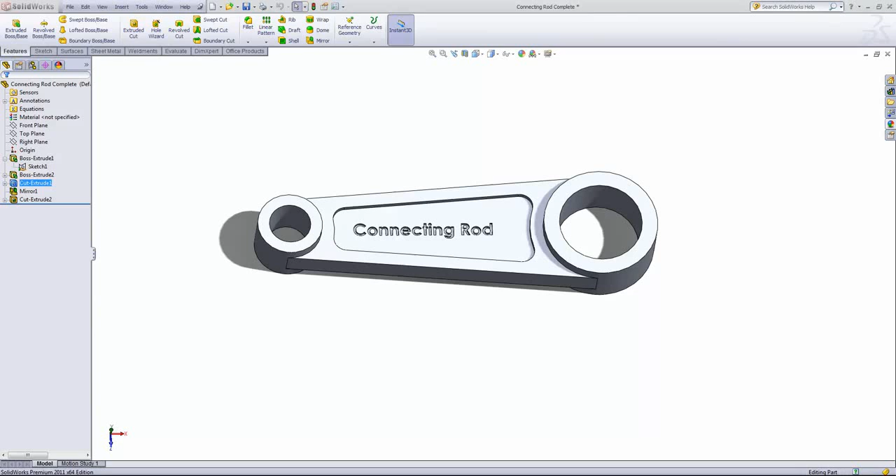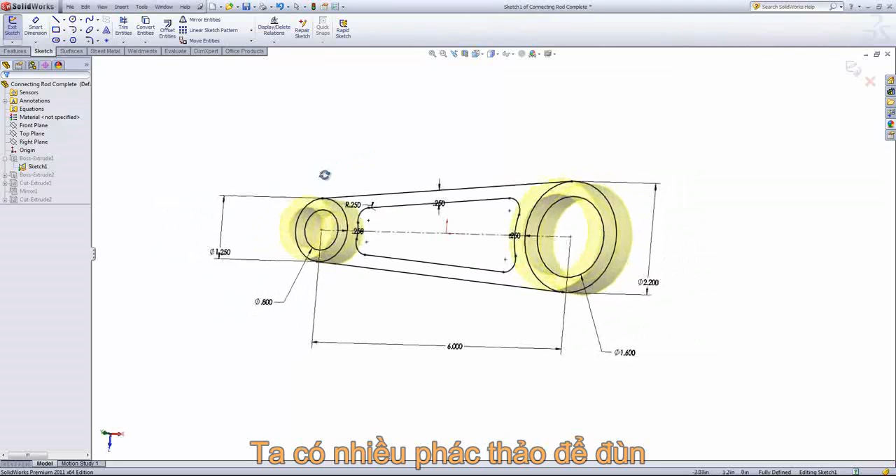In this video, we'll create multiple extrusions from the same sketch, and this allows you to create your entire profile. So the entire profile here that we see, except for the connecting rod sketch, is produced in a single sketch. If we take a look at that sketch, we can see that we have different profiles, and we're going to use them for separate extrusions.

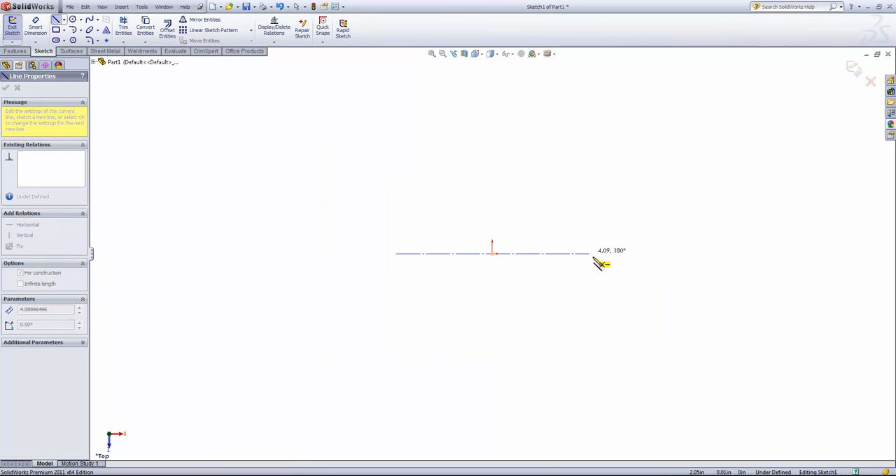So the first thing we'll do is create a new part. Then I'll go ahead and draw up a sketch on the top plane. We'll start by drawing in a center line horizontal to the origin. Then I'm going to make the center line and the origin have a midpoint relation. And then I'm going to place several circles on both sides of the line.

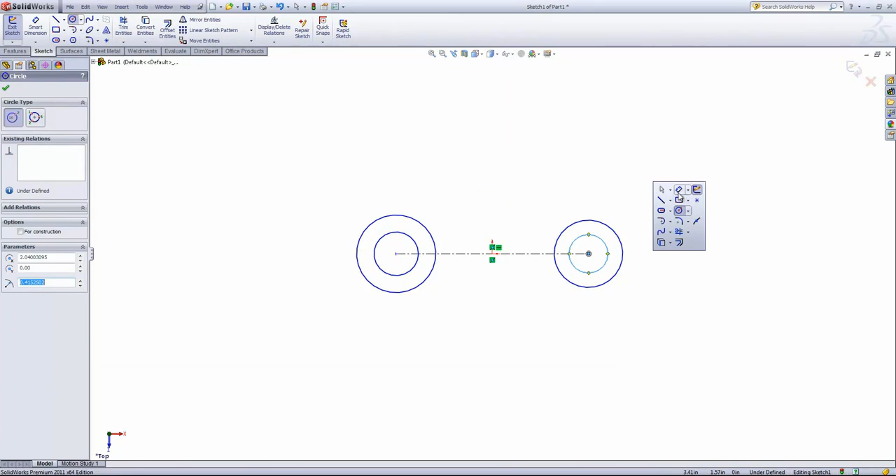And then we'll go ahead and give this dimensions. So the first circle will be 1 and a quarter, and this inside circle will have a diameter of 0.8 inches. On the other side, this will have a diameter of 2.2 inches, and the inside circle will have a diameter of 1.6.

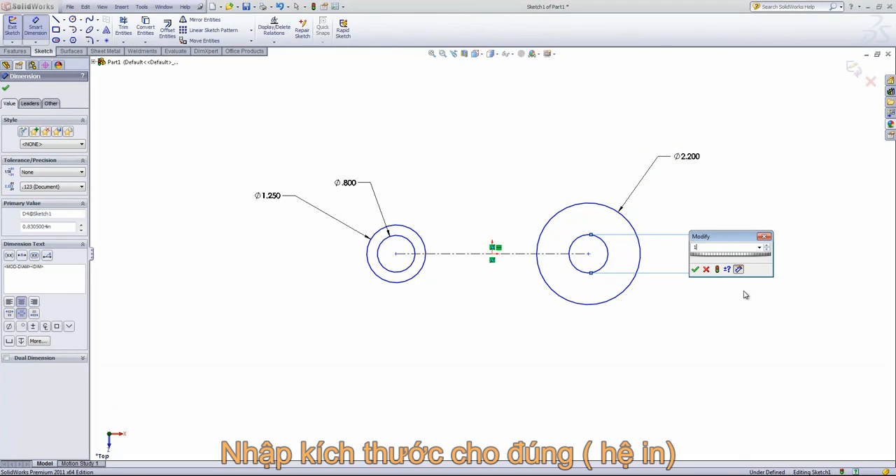From there, I'm going to give this center line a length of 6 inches. Then we're going to draw in a line from one circle to the other, and we want these two to be tangent.

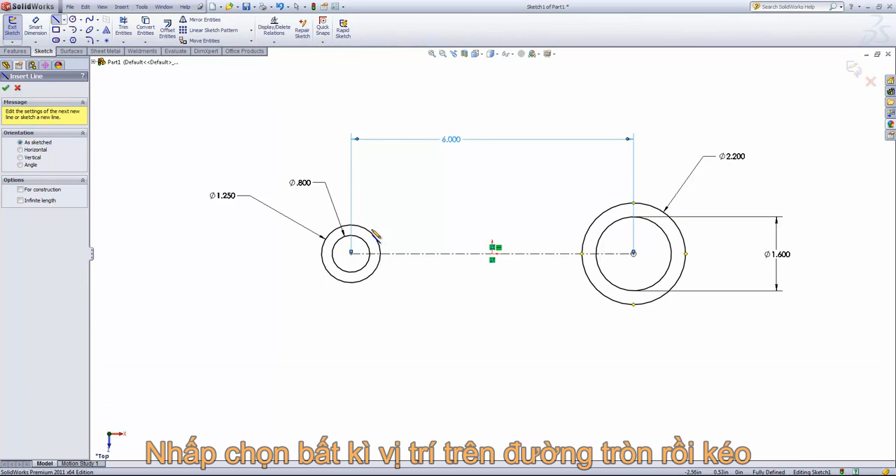And because they're a different size, the only point we don't want to click here is one of these quarter points, because that'll make it coincident to that quarter of the circle. So if I click anywhere else on the circle and draw out a line to the other circle here, I just want to make sure that tangent relation shows up on the right.

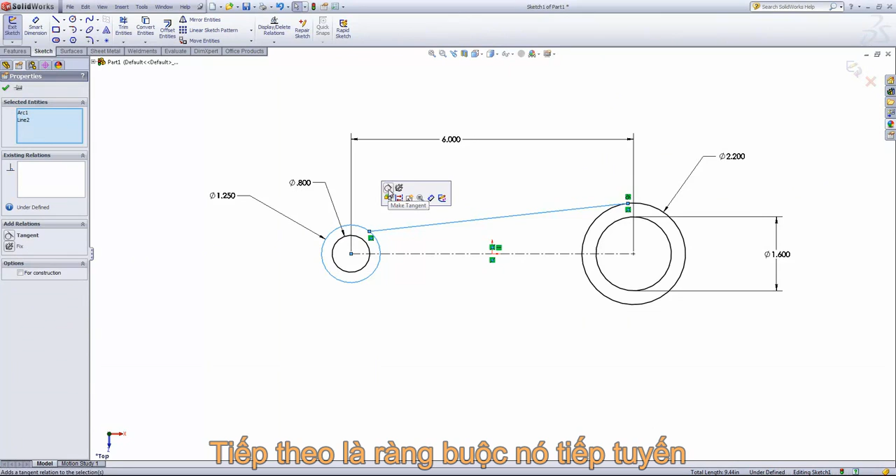I'll go ahead and control select the line and this circle and make these two tangent. And if you didn't have the tangent relation come in on the other side, you can do the same by control selecting the line here and the outside circle as well.

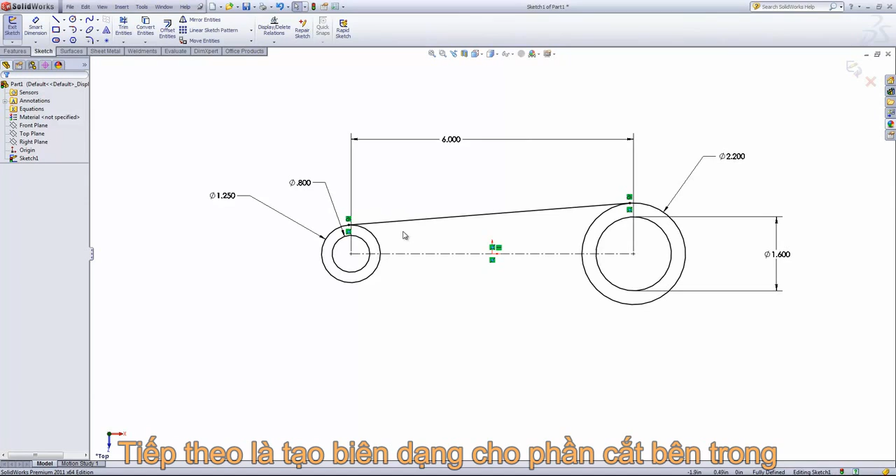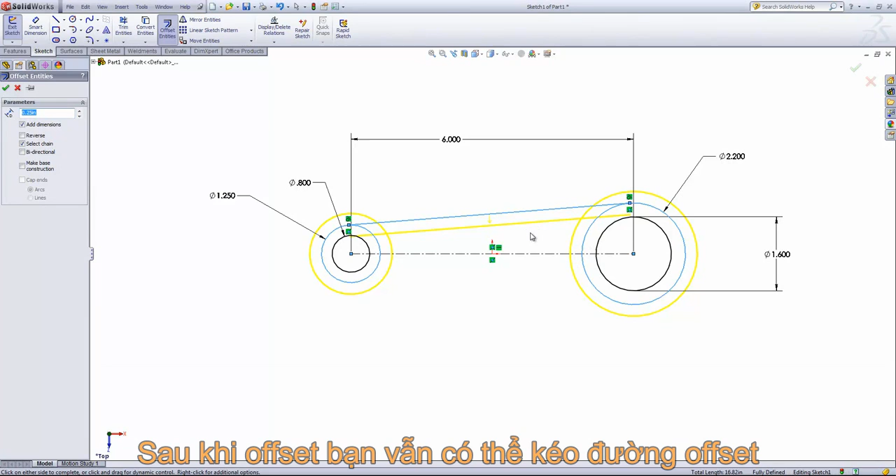From here, we want to create the inside profile for the cutout that we're going to have, and we'll do that using offset entities. I'm going to set the dimension to 1/4 inch, then select out that line, the circle, and this circle here. This is on the correct side, so I'll go ahead and click in the workspace and add that in.

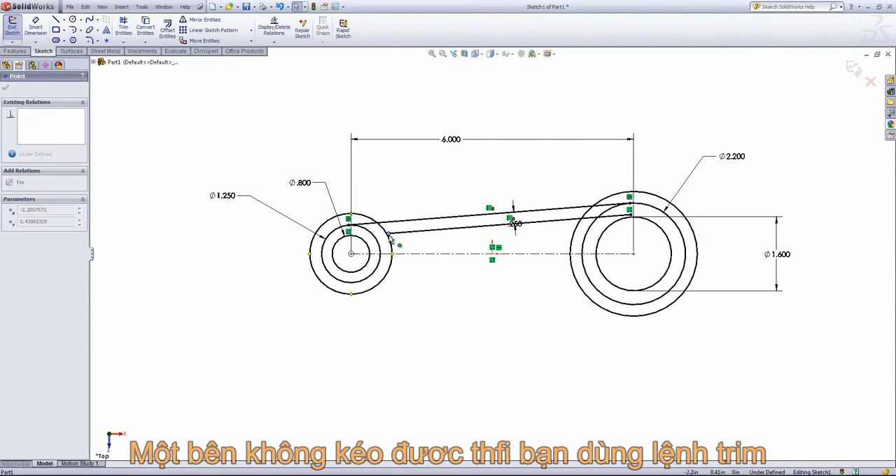Now normally with the offset entities, you can drag out points on a line. So this side we're able to drag out here, and this side we're not able to drag out, so we're just going to use a trim to finish off this profile. I'll drag this point out and control select this circle, and make that coincident. Then we'll come into the trim entities and choose trim to closest.

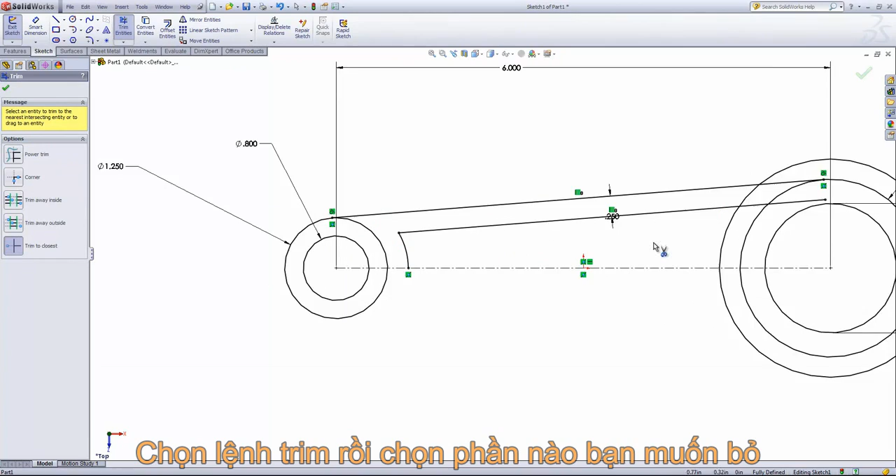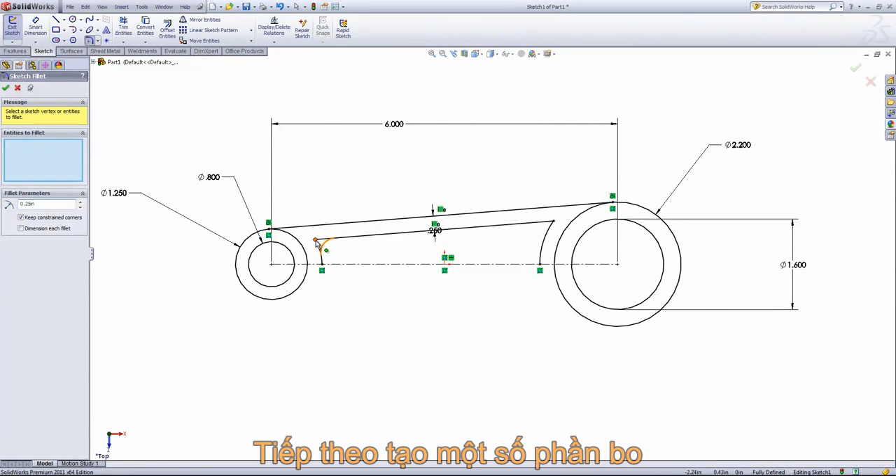I'll go ahead and select out all the entities that we want to remove. Once I have those selected, I'll click OK. And we're going to add in several fillets, so I'll choose the sketch fillet tool, set this to 1/4 inch, and select out these corners.

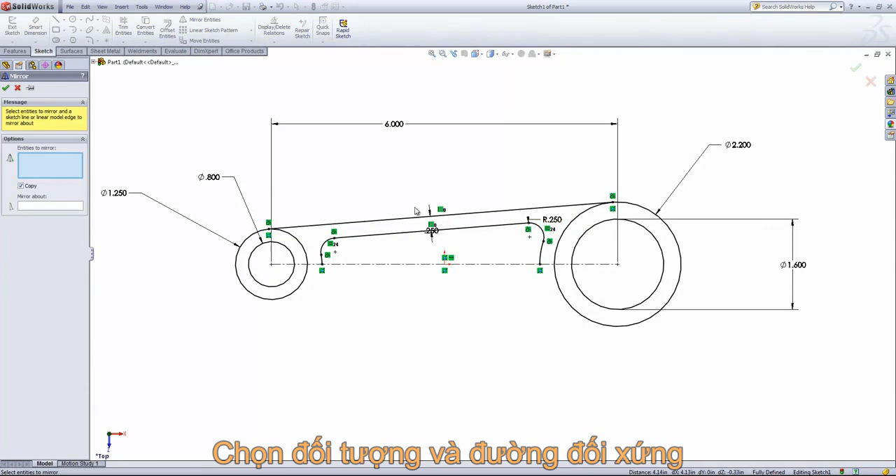Lastly, to finish up our sketch, I'm going to mirror over the inside lines as well as this outside line to the other side. So we'll choose the mirror entities, choose out the top line and each one of these inside lines. Then for the mirror about, we'll choose the center line, and we're just going to leave that copy option checked and click OK.

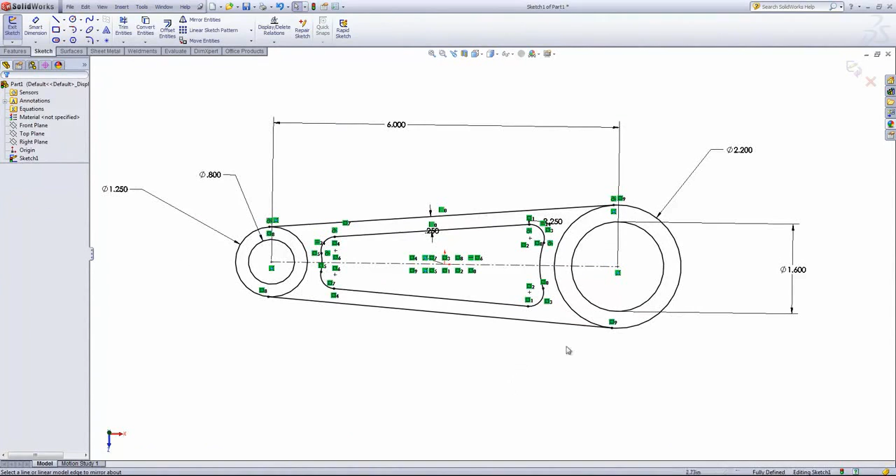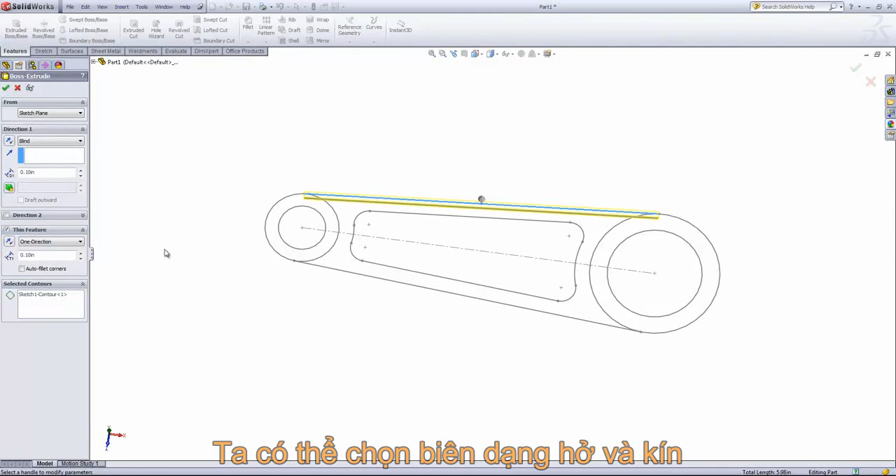From here I can go ahead and exit the sketch, and we can create our extrusion. Now when I choose the extrude tool and then choose the sketch, SOLIDWORKS is automatically going to look for open profiles or closed profiles. In this case it sees multiple profiles to work with, so it automatically brings you into this selected contour box.

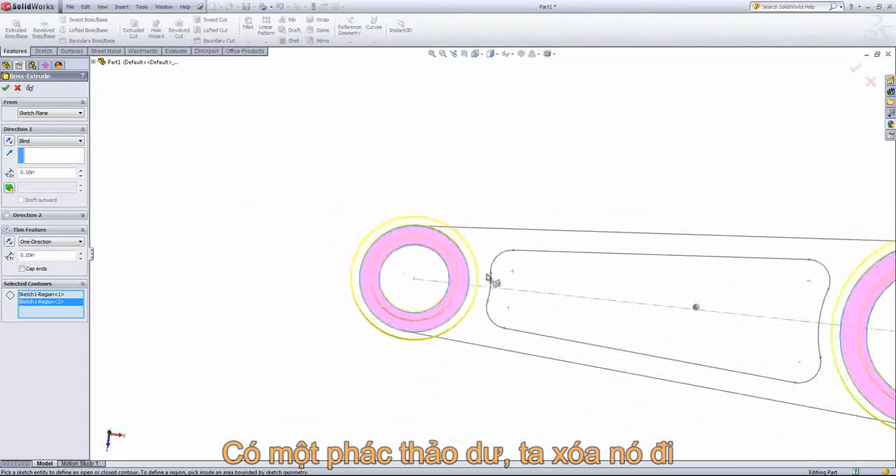If I delete out that line that I first selected, I can go ahead and choose out the two regions of those circles. And I can see it's using a thin feature, which we don't want in this case, so we can go ahead and remove that out.

Lastly, for this extrusion, I'm going to set the end condition to mid-plane, and we're going to set this to a depth of 1 inch. And exit the extrusion.

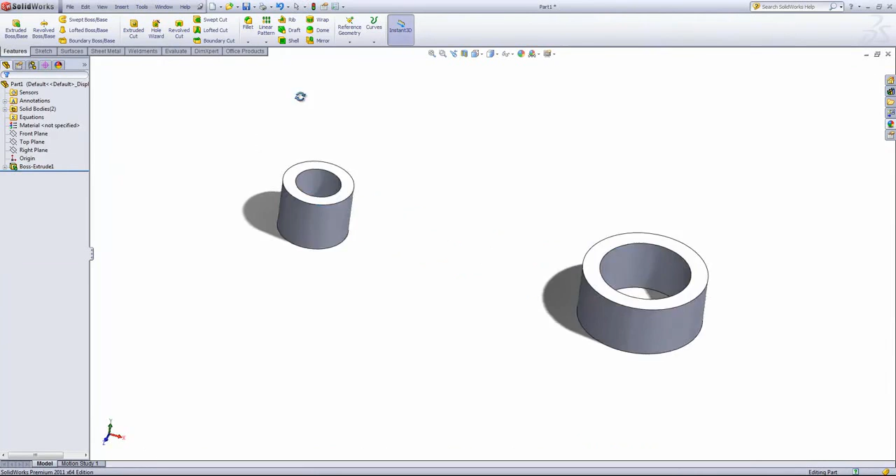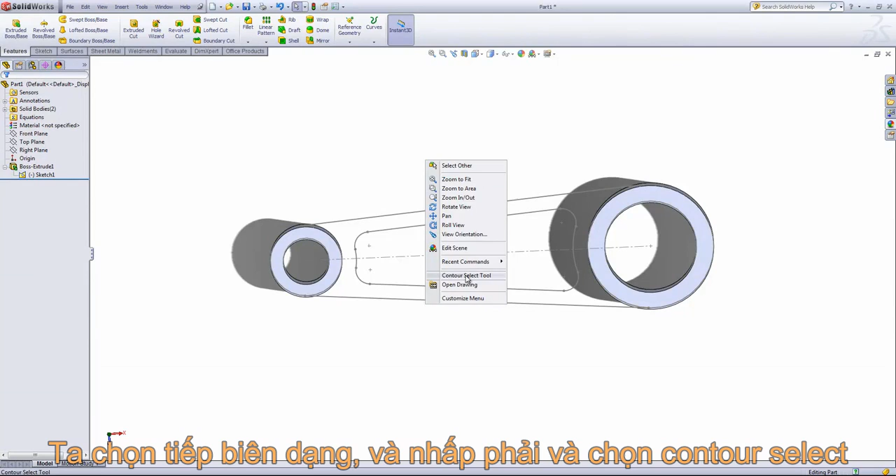Now we want to go ahead and reuse that sketch. We'll click on it and go to Show so we can see it. And that selected contours option can also be accessed before we go into the extruded feature. That can be done by right-clicking, coming down, and choosing the Contour Select tool. So in this case, I'll just choose this outside line, and that'll allow me to select this region. Then we can go into Extruded Boss Base, and it'll automatically populate that region into the selected contours box.

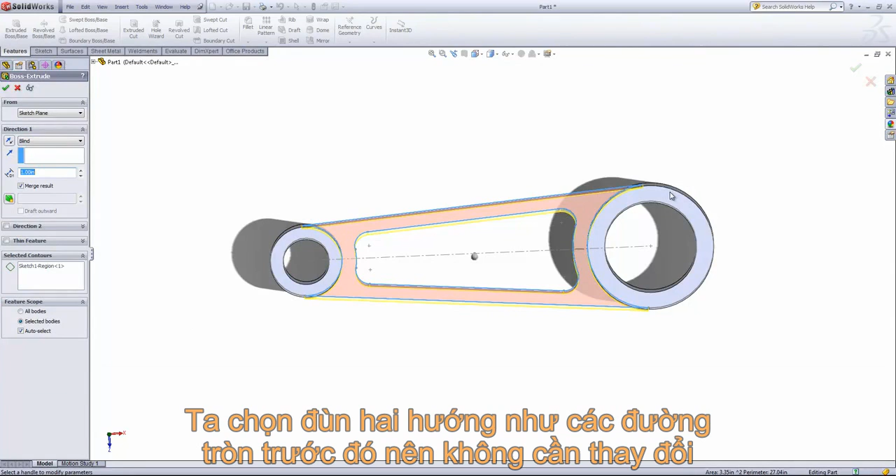You'll also notice that there's a feature scope. You can have this merge with all of the bodies or just with selected bodies. In this case, it's going to auto-select both cylinders there, so we don't have to change this. We're once again going to use a mid-plane end condition and choose 1/2 inch as the depth. Then I'll go ahead and exit the extrusion.

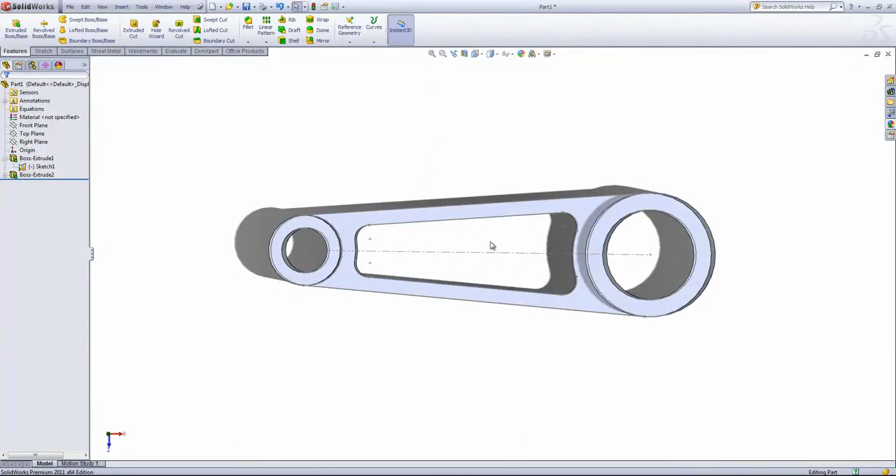Now from here, we had a pocket on each side with this profile, so we could do an extrusion from the inside. But I'm going to go ahead and come back into Boss Extrude 1 and choose out this region as well. And then we're going to use this profile to create a cut on the top.

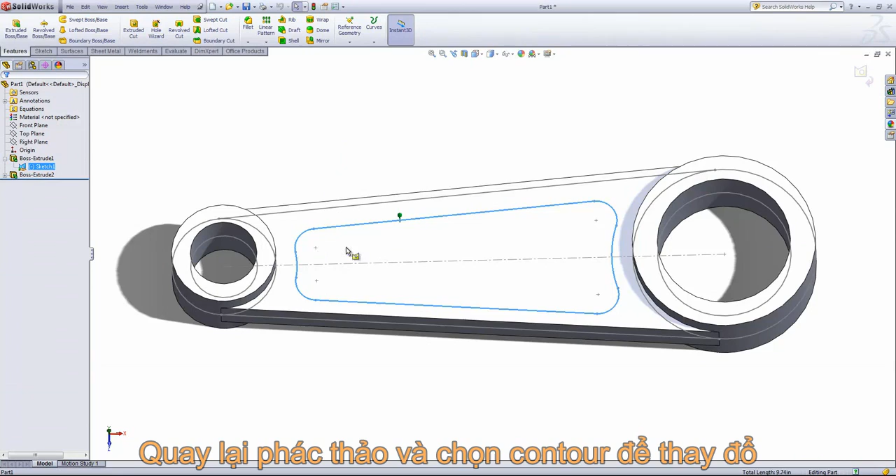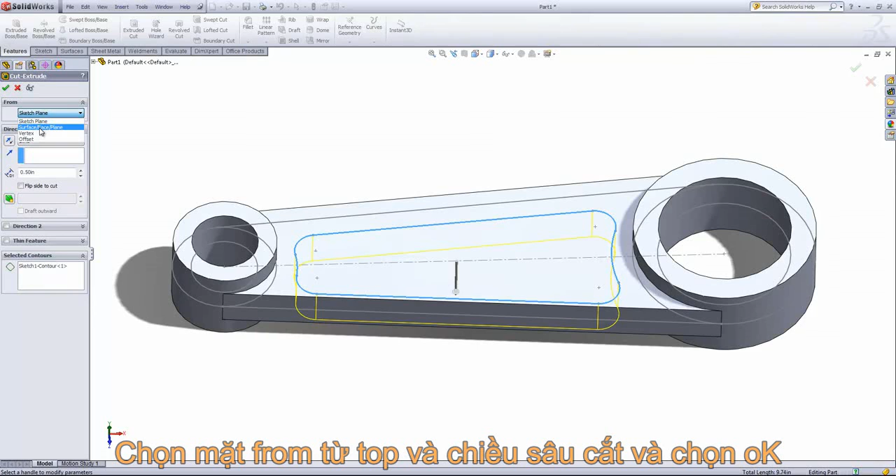Once again, I'll right-click and come into the Contour Select tool and choose out that contour. And I'm going to come into Extruded Cut. Looks like it's chosen the proper contour there. And now we actually want to cut from the top surface, so we're going to change the From option in the Cut Extrude to From a Surface Face or Plane, and just choose that top face.

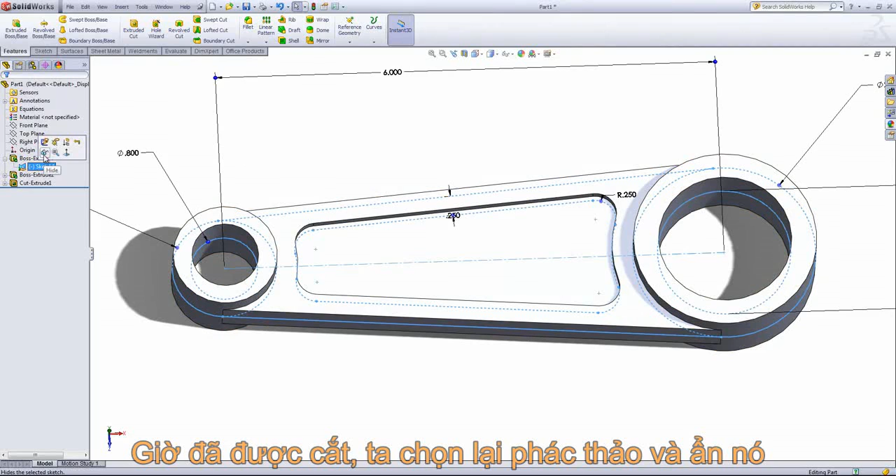For the depth, I'm going to choose 0.1 inches, and I'll go ahead and click OK. That creates our cutout on one side. Now I can go ahead and click on the sketch and hide it away.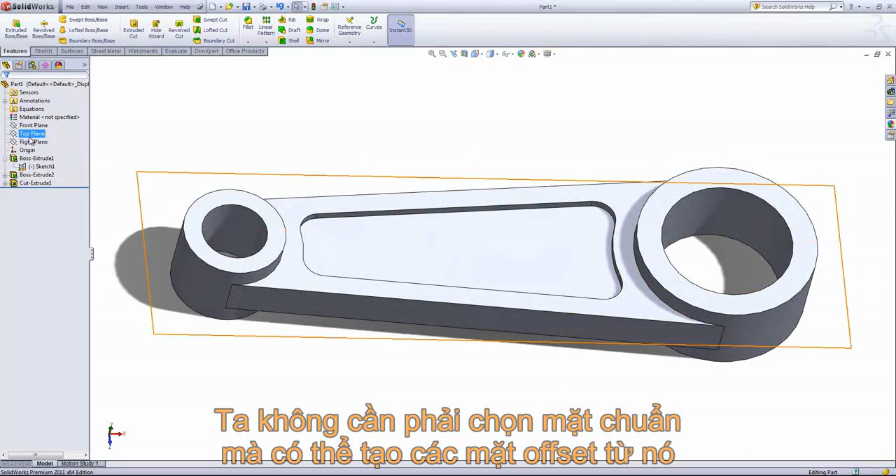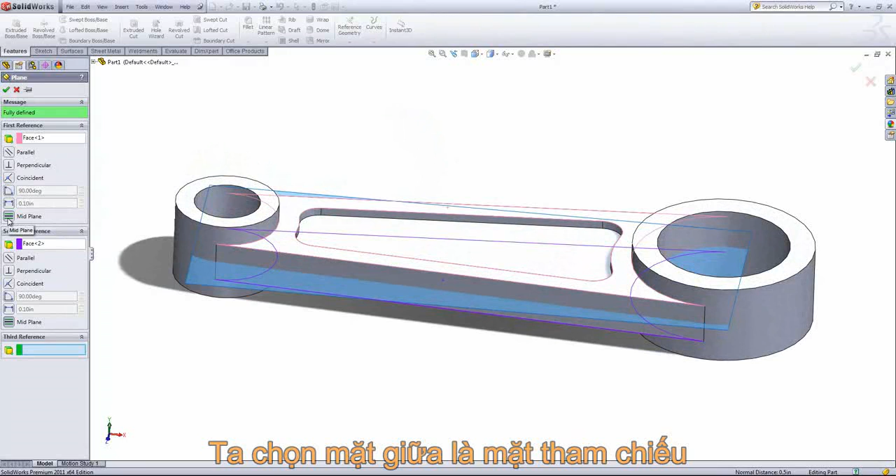And we just want to mirror over this pocket to the other side. Since we did do a mid-plane extrusion, we could just go ahead and use the top plane. But let's say that we didn't model it this way and that it's a little bit offset from any of our standard planes there. We can just come into the reference geometry, choose the plane option, and then we can go ahead and select the two sides or the two opposite faces there. And by default, that's going to choose the mid-plane option for the reference geometry there, so we can go ahead and click OK.

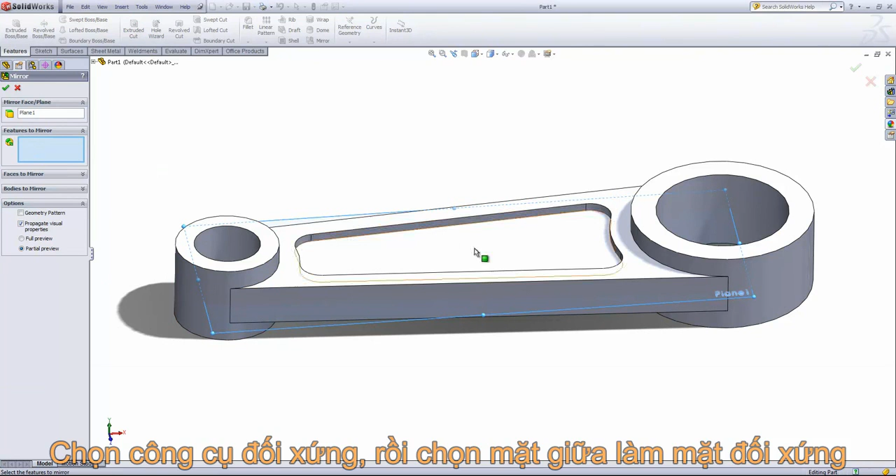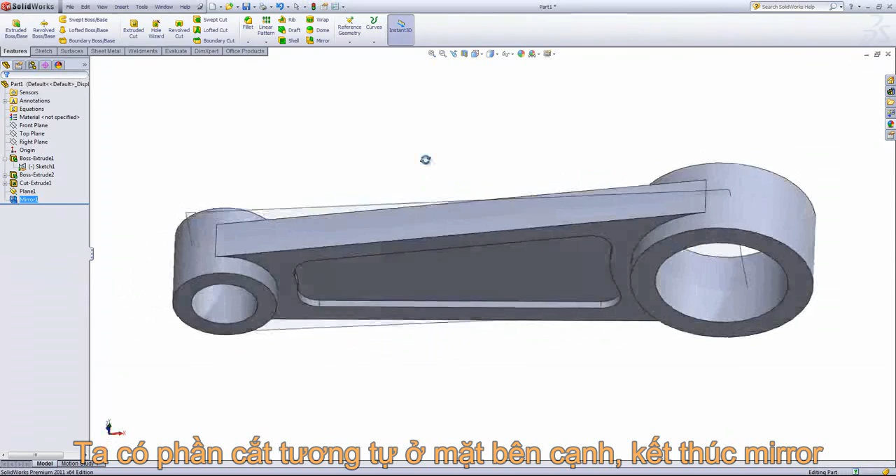And now we have our mirror plane. Next, I'll come into the mirror tool, choose our plane 1 there as the mirror face, and I'll choose the cutout pocket as the feature to mirror. And if we choose the geometry pattern option, this option would ignore any end conditions or starting conditions and just try to create the geometry on the other side. And that'll complete our mirror.

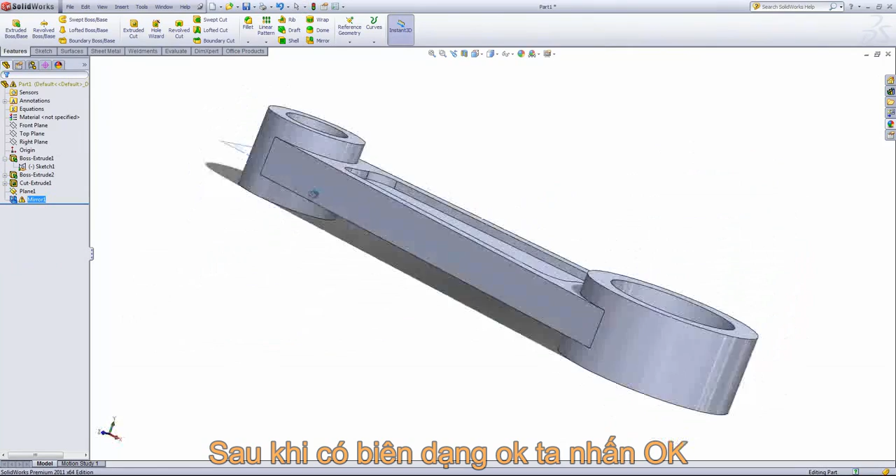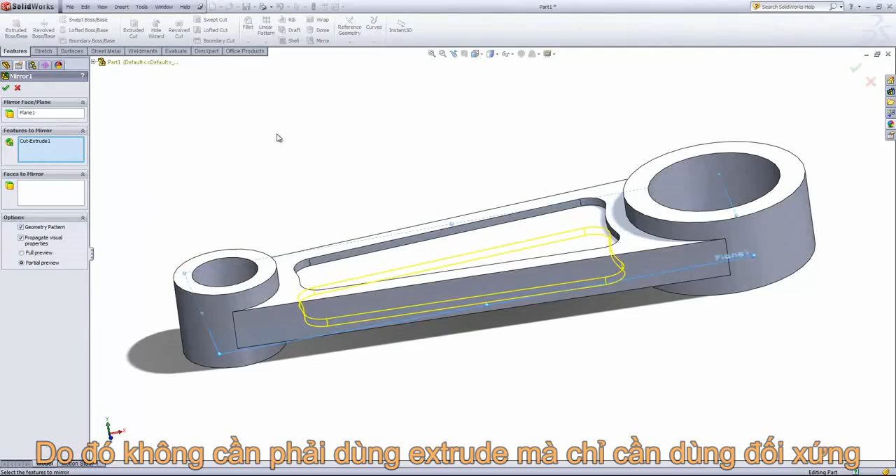If I did, however, go back in and edit the feature and uncheck that geometry pattern option, it's going to try to not only copy the cut extrude, but copy any from or end conditions that we used. So if I click OK, you'll see that that mirror no longer completes. You see that we have an error. The reason for this is that we used a from starting condition for the cutout, and so it's looking for that same face to start the cut on the other side. So it's not going to be able to do that. And so we're going to have to use that geometry pattern option to complete the mirror.

I can go ahead and hide out that plane. And the last thing we'll do here is add in a cutout for some sketched text. So I'll go ahead and create a sketch on this cutout face.

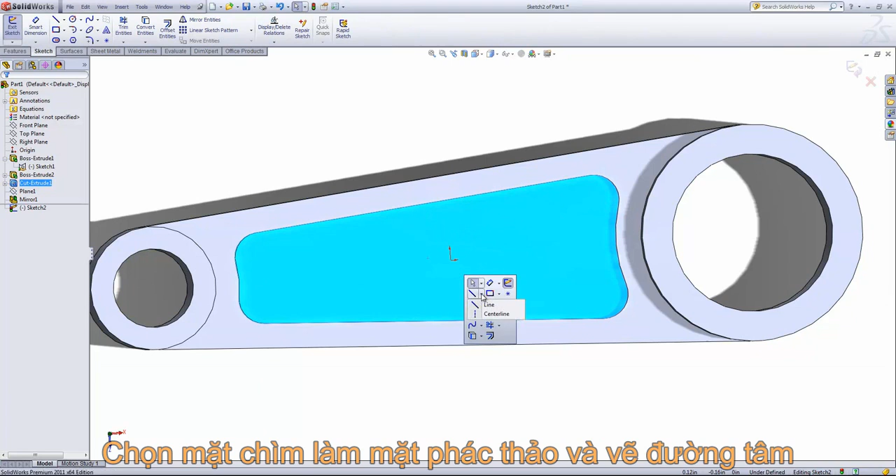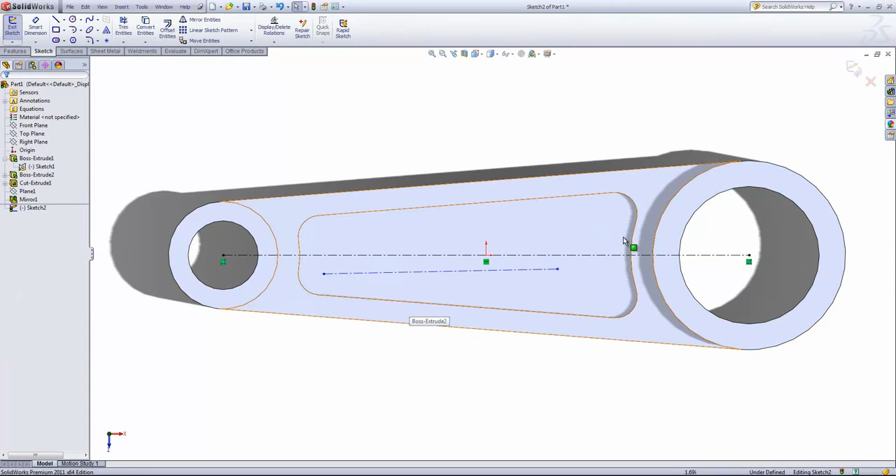And then we're going to go ahead and draw in a center line. I'm going to just draw in two. First, I'm going to go normal to this sketch by doing the space bar normal to. And I'm also going to draw a center line across from center to center there. Then I'm going to go ahead and make this center line and this center line parallel.

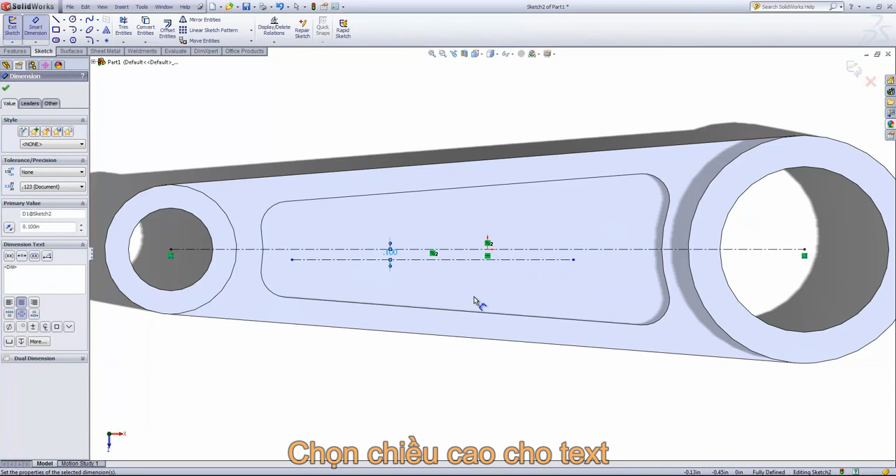And the reason I did that is the sketch text is going to sit on top of the line that I choose, and if I did it here, our sketch text would be a little bit above the center. So I'm going to go ahead and dimension this off, let's say by 0.1 inches, and we should be able to get our sketch text roughly centered.

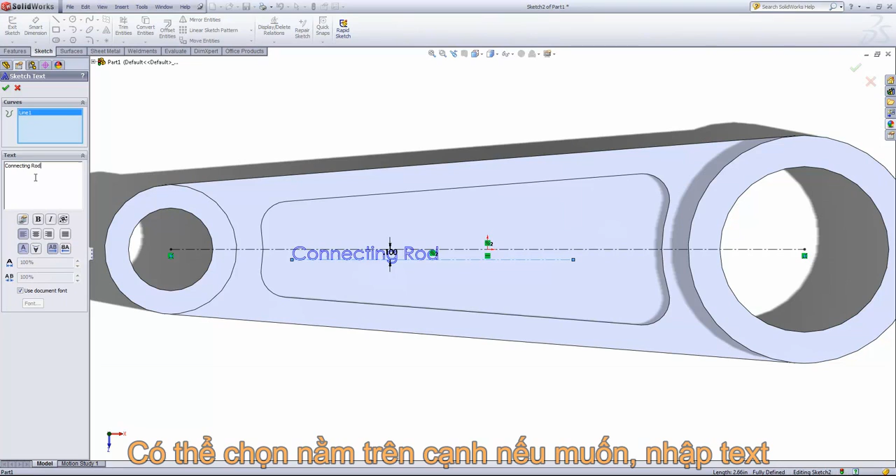So when I go into the sketch text option, the first selection is curves. It wants me to select either a curve or an edge to add the text on. And then I can go ahead and type it in to this box. I can also change the size of this. If I uncheck the Use Document Font, I can come in and increase this to, let's say, a height of 0.2 inches, and that'll get it centered along that line.

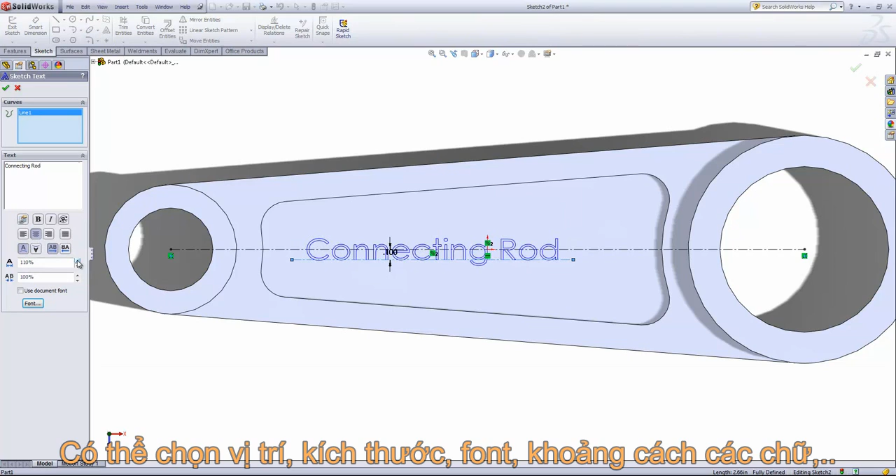You also have options of flipping the text as well as the direction there and choosing how to orient it. We could also change the spacing. And we can go ahead and exit.

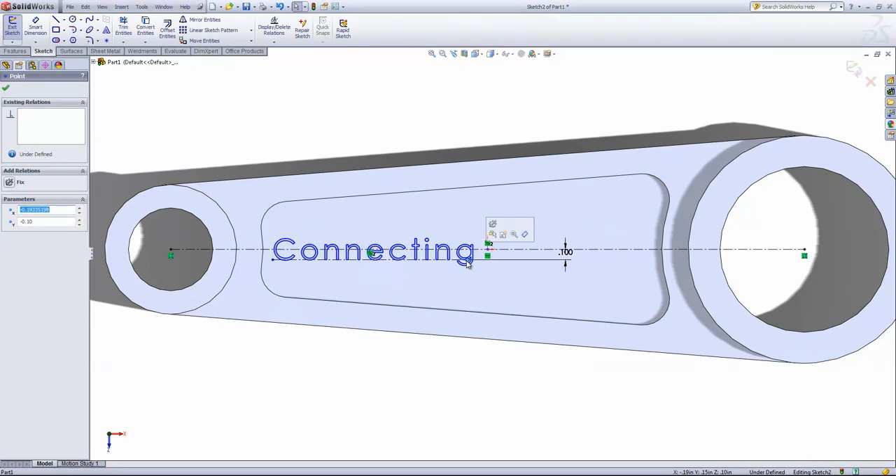And depending on the options you choose, if you drag out these lines, it'll go ahead and move the text there. And if you bring in the end of this center line past certain letters, it'll go ahead and remove those out or won't display them. So we'll stretch this out a little bit to make it roughly centered and then exit the sketch.

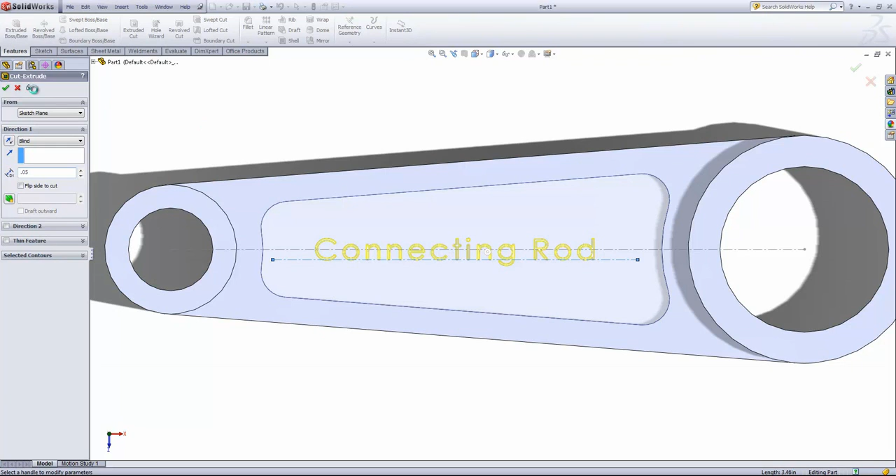Lastly, I'll just come into the extruded cut and choose this sketch. And we'll choose to extrude this to a depth of 0.05 inches. And there we have our completed connecting rod.